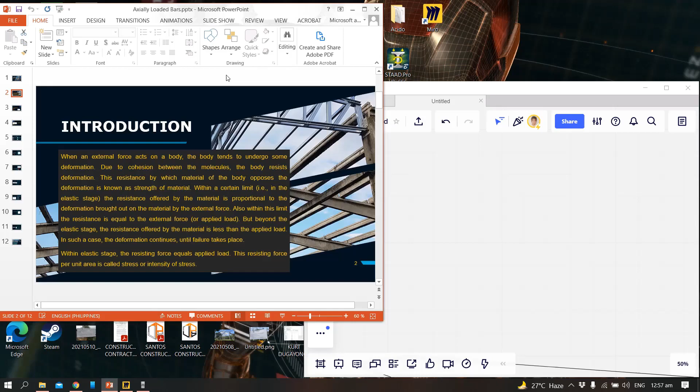Also within this limit, the resistance is equal to the external force or applied load. But beyond the elastic stage, the resistance offered by the material is less than the applied load. In such case, the deformation continues until failure takes place. Within the elastic stage, the resisting force equals applied load. The resisting force per unit area is called stress or intensity of stress. So let's talk about stress.

What is stress? Stress is the force of resistance per unit area offered by a body against deformation. The external force acting on the body is called the load or force. The load is applied on the body while the stress is induced in the material of the body. A loaded member remains in equilibrium when the resistance offered by the member against the deformation and the applied force,

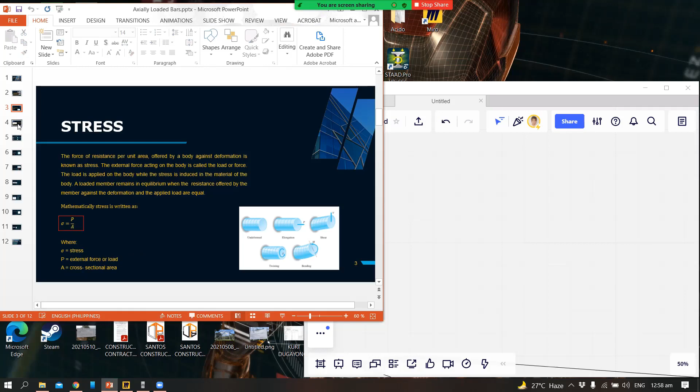or load, are equal. So mathematically, stress is written as P over A. So ito yung symbol ng stress natin, P over A. P is the external force or load and A is the cross-sectional area. Okay? Strain. Ano naman ang strain?

When a body is subjected to external force, there is some change of the dimension of the body. The ratio of change of the dimension of the body to the original dimension is known as strain. Strain is dimensionless. Bakit sir dimensionless? Dimensionless kasi ito guys ito ang strain natin. Ito ang symbol ng strain natin. Strain is equal to the increase or decrease in length, which is delta, over L, the original length.

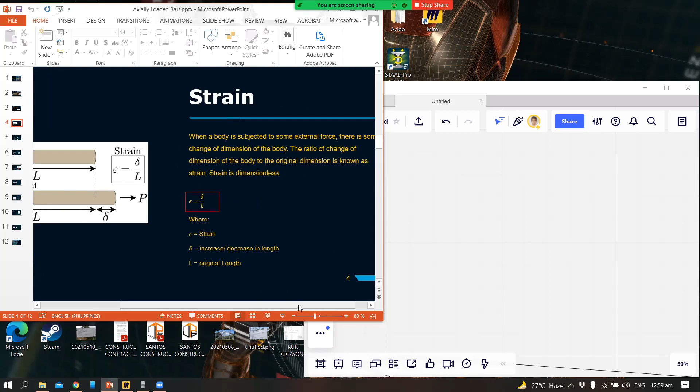So mapapansin nyo, dimensionless siya kasi ang increase and decrease in length is in terms of meters. Ang original length naman is in terms of meters. So magka-cancel out lang siya. So ratio siya ng increase and decrease in length versus original length. Ayan. Strain may be tensile strain, compressive strain, volumetric strain, or shear strain. Okay.

So, normal types of internal forces. Ano yung mga internal forces natin? Normal force, P, is the component of the resultant force that is perpendicular to the cross-section, tending to elongate or shorten the bar. P. So, perpendicular siya doon sa area natin. Okay? Shear force naman is the component of the resultant force lying in the plane of the cross-section, tending to shear, slide, one segment of the bar relative to the other segment.

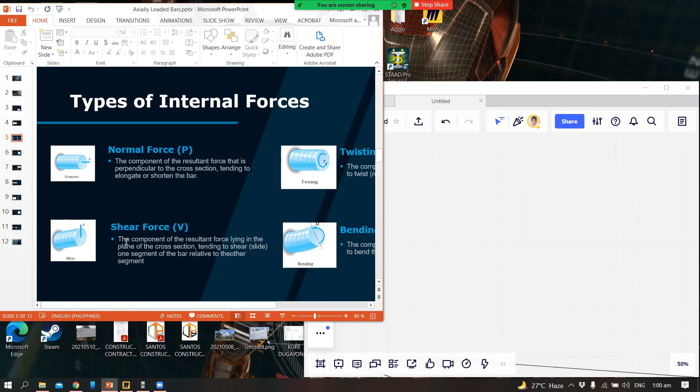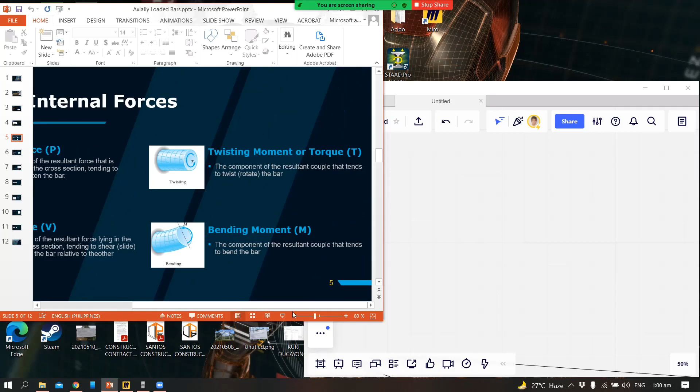So ang shear force is parallel siya sa area ng material natin. The twisting moment or torque is the component of the resultant couple that tends to twist or rotate the bar. The bending moment naman is the component of the resultant couple that tends to bend the bar. Ayan. Bending moment is kabaligtaran ng twisting moment. Okay. Next slide tayo.

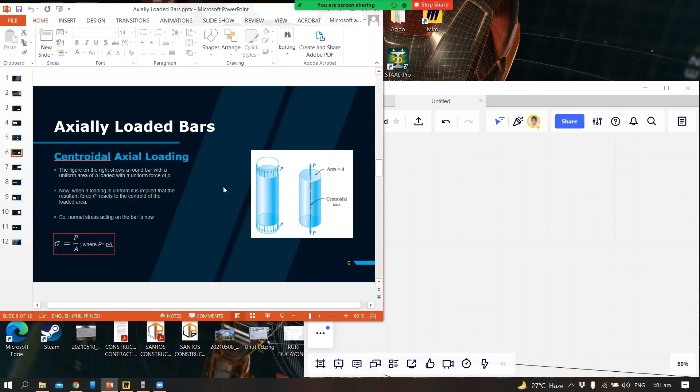material na to. So normal stress is equal to P over A, where P is equal to p, yung maliit na p, which is the uniform force, times the area of the cross-section. Okay? So, stress is equal to P over A. Okay.

Axially loaded bars sa mga inclined planes naman. Guys, ito, inclined planes. When a bar of cross-sectional area A is subjected to an axial load P, the normal stress P over A acts on the cross-section of the bar. Let us now consider the stress that acts on a plane that is inclined at an angle to the cross-section. So, punta tayo dito sa whiteboard natin.

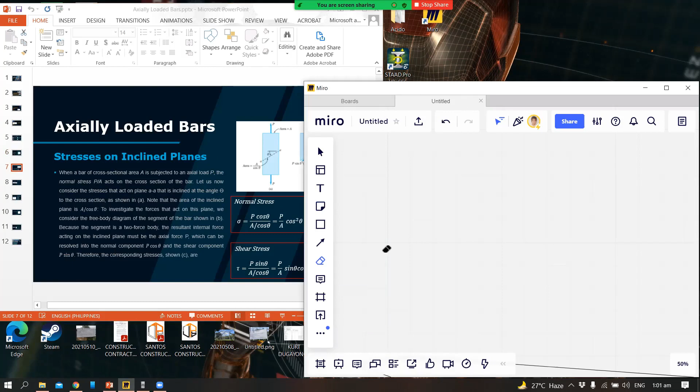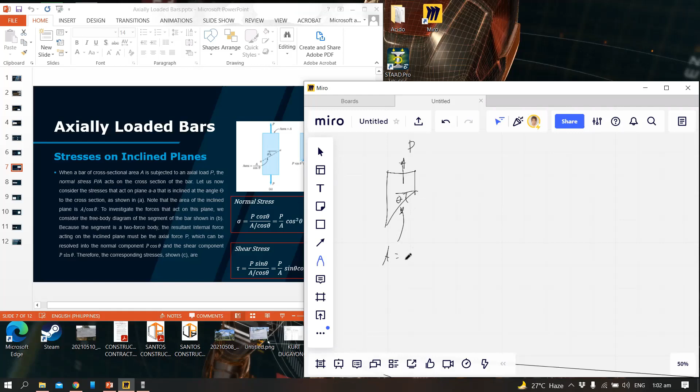So now, may bar tayo, okay? May inclined daw. Inclined yung area niya. So, dito, may P. Okay? So, itong angle na to, theta. So, ang cross-sectional area nito is A over cosine theta. Bakit A over cosine theta? Okay guys, ganito yan.

Supposedly, sa 2D plane natin, kung kinat mo yung bar sa side na to, ito yung cut, from A to A, ang area lang niyan is A, di ba? Tama? A lang yan. Pero pag nag-cut tayo diagonally, magkakaroon tayo ng ibang area. Ito yung A. Ito theta to, di ba? So, theta din to. Matik, di ba?

So, ito yung triangle dito. Ito na yung A. Theta. Sabihin natin X na lang to, saka Y. So, using SOHCAHTOA, gamitin natin tong CAH. Cosine theta is equal to adjacent, A, over hypotenuse, which is Y. Tama? So, Y now is equal to A over cosine theta. Ayan. Tama?

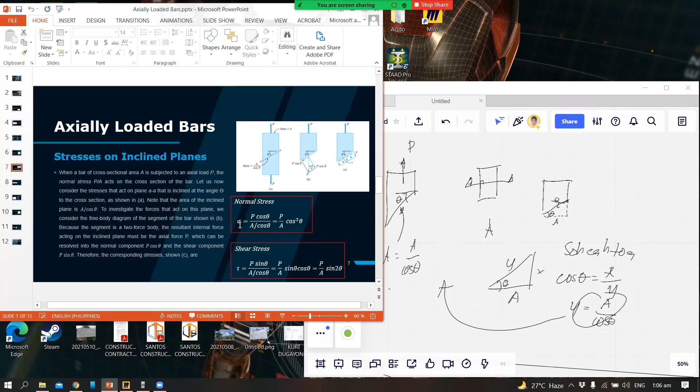So, A over cosine theta. Ito ang area na to. Tama ba? Okay, I guess tama naman yan. Balik tayo dito. So, normal stress now is equal to P cosine theta over A over cosine theta. Bakit ganito? P cosine theta. Bakit P cosine theta naman yun?

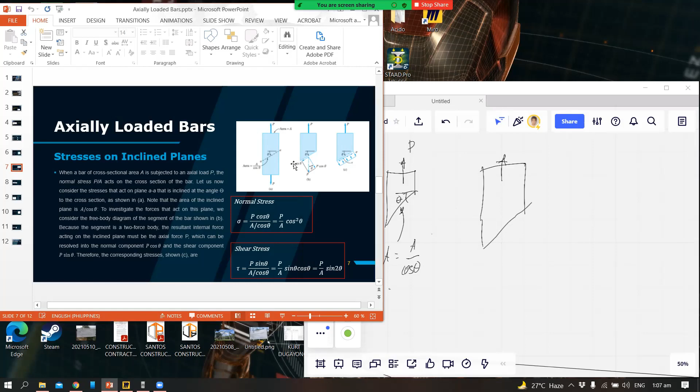Which is, ang theta niya, mapapansin nyo, ayun. Since itong linya na to, tangent siya dito, dito ang theta. Which is, dito naman ang theta. Tama? So, P to. So, by getting the X and Y components of P, dito, P cosine theta to. So, ito naman, P sine theta. Kuha nyo?

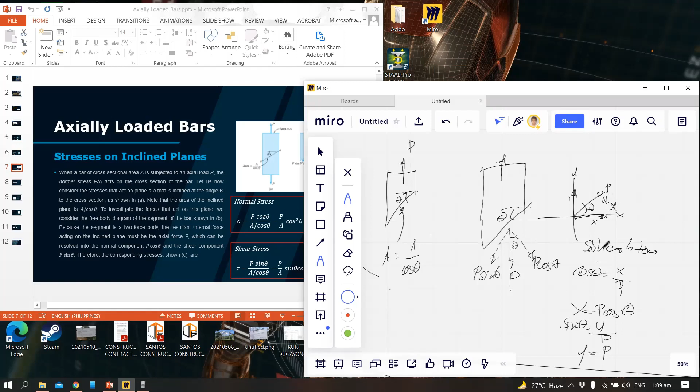Using SOHCAHTOA again, cosine theta. Gamitin natin cosine theta. Cosine theta is equal now to adjacent, which is x, over hypotenuse, which is the P. So, x now is equal to P cosine theta. Tama? And y naman, paano natin kunin itong y? Gamitin natin itong SOH, which is sine theta is equal to opposite, which is y, over hypotenuse, which is P. So, y now is equal to P sine theta. Ayan. P cosine theta, P sine theta.

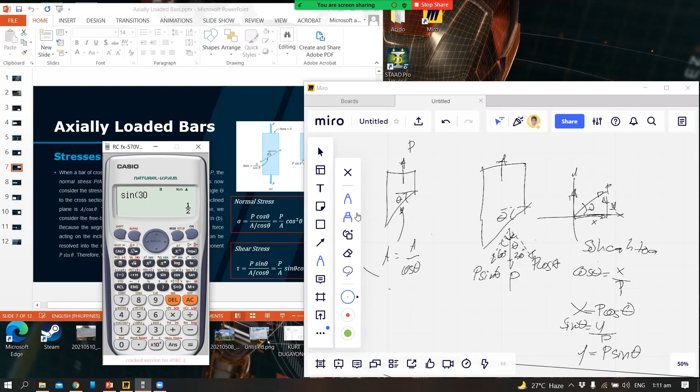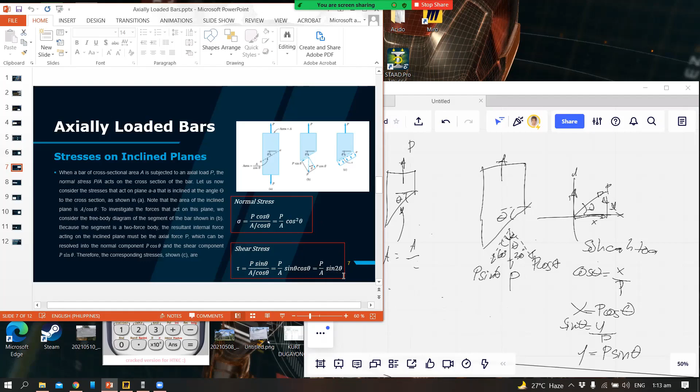Kaya, ito, normal stress. Normal is the stress normal to the plane. So, normal stress is equal to P cosine theta over A over cosine theta, itong area, projected area. So, simplify that, we get now P over A cosine squared theta. Sa shear stress naman, we get now P sine theta, which is the Y component of P, over A over cosine theta, yung projected area niya. So, simplified, P over A sine theta cosine theta, which is equal to P over 2A sine 2 theta. Trigonometric identity: sine theta cosine theta is related to sine 2 theta.

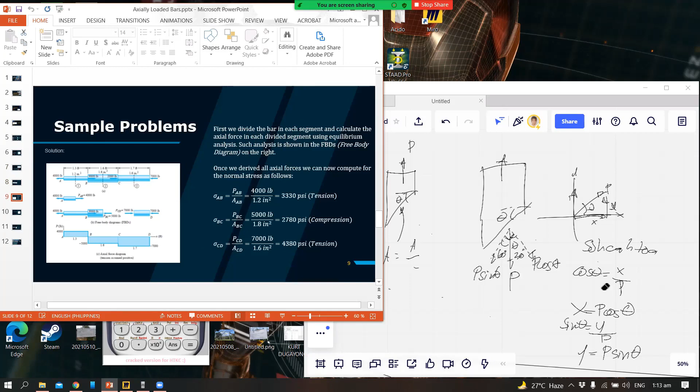Next, we get some sample problems. Ito yung problem. The bar ABCD in figure A consists of 3 cylindrical steel segments with different lengths and cross-sectional areas. Axial loads are applied as shown. Calculate the normal stress in each segment. So, first, we divide the bar in each segment and calculate the axial force in each divided segment using equilibrium analysis. Such analysis is shown in the FBD, free body diagrams on the right.

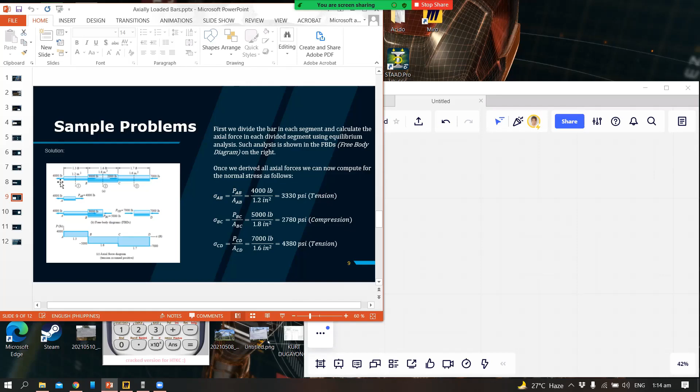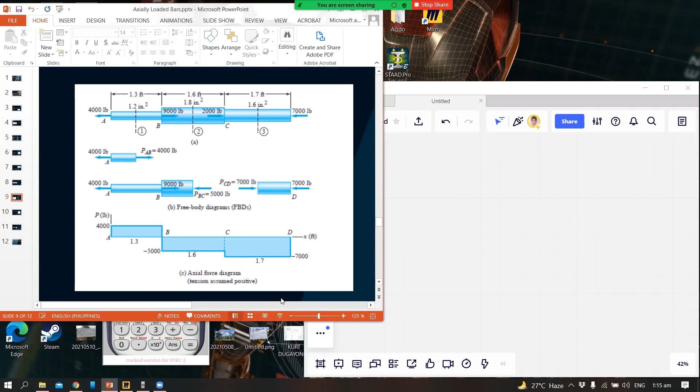So, stress now of PAB. Nag-free body diagram tayo. Sa part AB, ikakat natin dito sa gitna ni AB. So, kung may 4,000 pounds dito, meron ding 4,000 pounds dito. So, PAB is equal to 4,000 pounds divided by the area, which is 1.2 inches squared, which is 3,330 PSI, tension. Bakit tension? Hinila mo yung bar.

So, nag-elongate siya. Dito naman kay BC, kakat natin dito yung bar. Consider natin itong 4,000 LB, tapos may 9,000 doon. Using summation of forces in X, we get now 5,000 pounds. 1.8 inches squared yung area. So, 5,000 divided by 1.8, 2,780 PSI compression, kasi pa-compress tong 5,000 pounds. Tapos dito naman kay CD, pwede nyo i-cut dito at i-consider yung left part, pero mas madali kung sa right part tayo mag-consider.

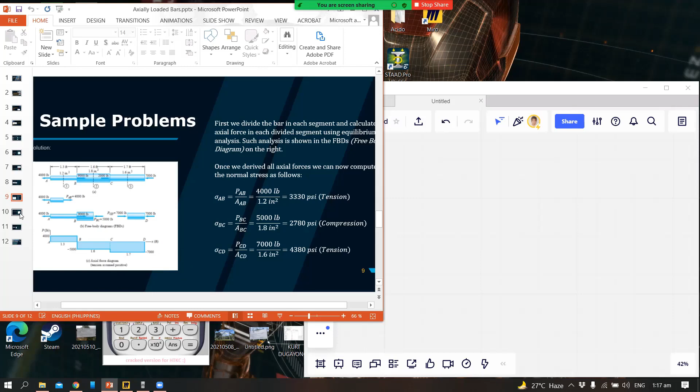Sample problem number 2. Figure A shows a two-member truss supporting a block of weight W. The cross-sectional areas of the members are 800 mm squared for AB and 400 mm squared for AC. Determine the maximum safe value of W if the working stresses are 110 MPa for AB and 120 MPa for AC.

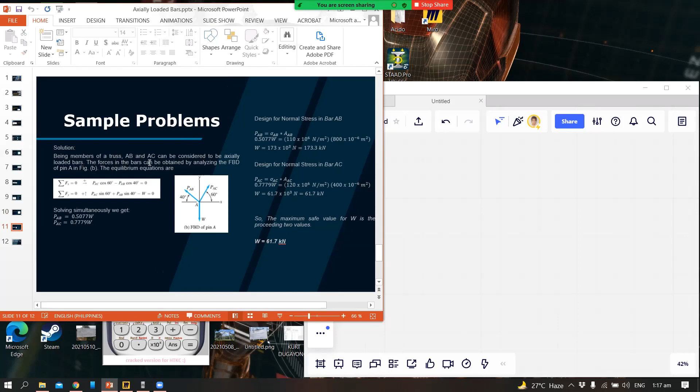So, this one. Being members of a truss, AB and AC can be considered to be axially loaded bars. The forces in the bars can be determined by analyzing the FBD at pin A in figure B. The equilibrium equations are... so, let's draw the FBD of this part.

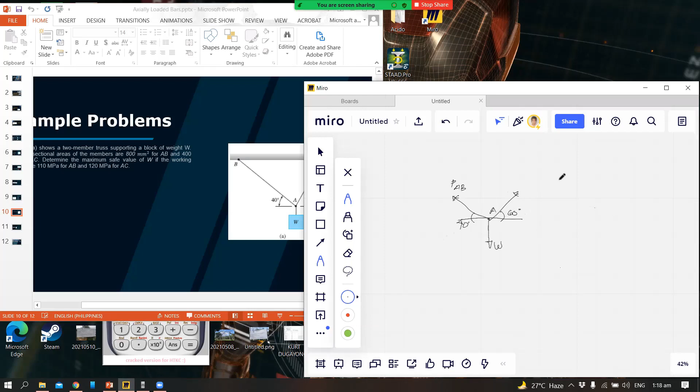So here we get PAB, and this one is PAC. Okay. So, summation of forces X is equal to 0. Summation of force X is PAC cosine 60, the X component of PAC, as we discussed earlier. Then less PAB at 40; the X component of PAB is cosine 40, is equal to 0. Okay?

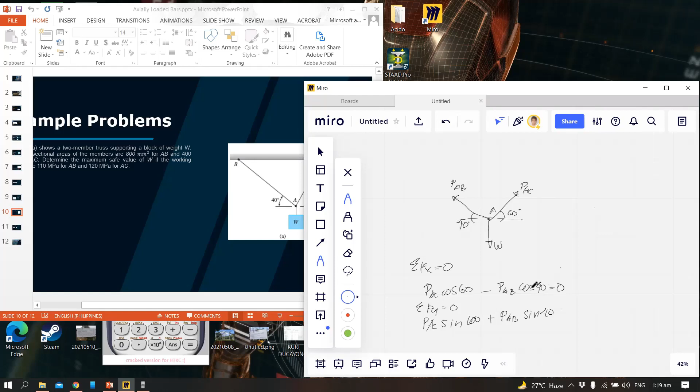Then, summation of forces Y is equal to 0. This one is for PAC: PAC sine 60, plus PAB sine 40, and is equal to W. So it's correct. PAC cosine 60 less PAB cosine 40; PAC sine 60 plus PAB sine 40 is equal to W.

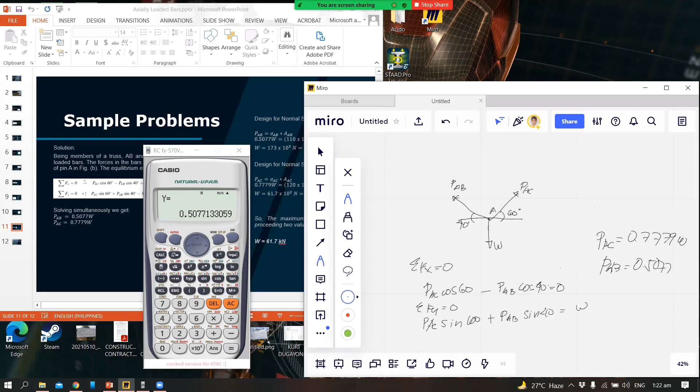Now, design for normal stress in bar AB. Normal stress is equal to P over A, and A is transposed to the other side. So for AB, 0.5077 W is equal to 110 times 10 to the 6 Newton per meter squared, the given working stress for AB, times 800 times 10 to the negative 6 meter squared, the area of 800 mm squared converted to meters so the units cancel. So we now get 173 times 10 to the 3 Newton, or 173.3 kilonewton.